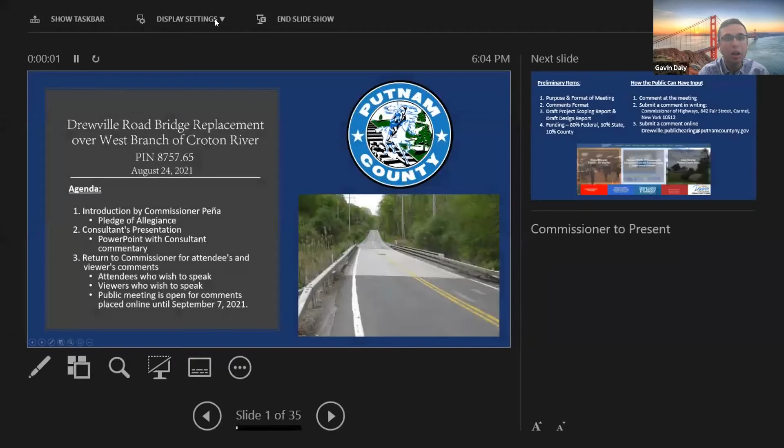Okay, so you're the host. Okay, sounds good. All right, can everyone see the slides now? Should just be a single slide. Yes, we can see the slide. Perfect. Okay, so I have a different slide with my notes that I'm going to go through.

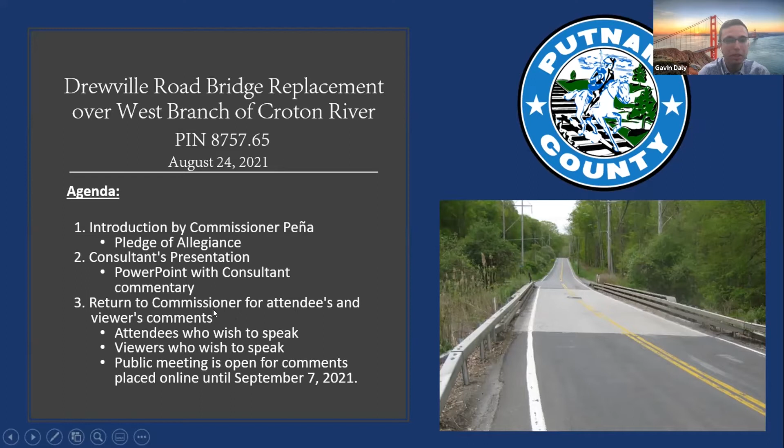Just a quick rundown of the agenda. Alexis, thank you for the introduction and going through the Pledge of Allegiance. I'm going to go through the design consultant's presentation, and then we'll return to the county staff to go through the attendees' comments and discuss the format of that. I'll just go on to the next slide.

As I was introduced, my name is Gavin Daly. I'm an engineer with McLaren Engineering Group, the firm retained by the county to design and oversee this project. This project is PIN number 8757.65, Drewville Road Bridge, County Road 36, over the West Branch of the Croton River, located in the town of Carmel, Putnam County, New York. The goal of this public information meeting is to outline the purpose, the use, and the benefit to be served by the project. We'll discuss the location of the project and the reasons for the selection of that location, and the general effect of the project on the environment and residents of the town of Carmel and the county of Putnam.

For this presentation, I will cover some background information on this project and how it has come to be. I will then present the design objectives of the project and how the project is being funded. Next, I will review the design alternatives that were evaluated by the county and ultimately discounted for various reasons. After that, I will describe the preferred alternative in detail and why it was chosen by the county as the preferred alternative. I will then recap the project, after which we will take formal public comments and questions for the record.

This meeting is being recorded. An audio-visual recording will be available at the county's website, www.putnamcountyny.gov/highways projects. Additionally, various documents will be made available to the public for examination by appointment and with adherence to proper health protocols at the Office of the County Executive and at the Office of the Putnam County Clerk. Any person who would like to examine these records should contact the County Office at 845-808-1142, extension 49301, to make an appointment.

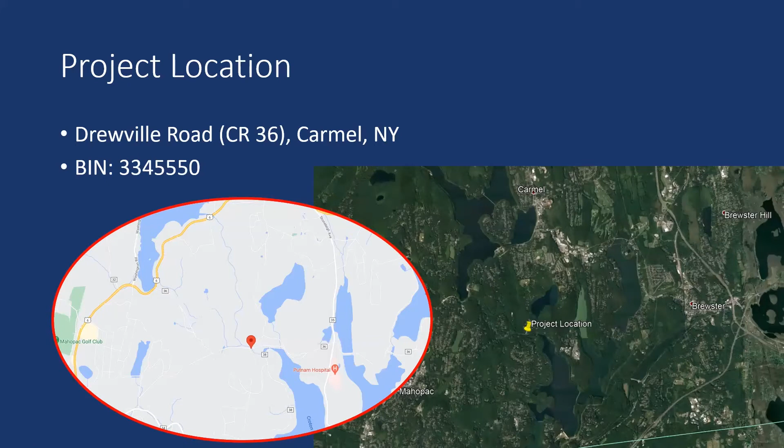There are several key stakeholders involved with this project. First and foremost is the owner of the bridge, Putnam County, as well as the town of Carmel and local residents and road users who cross the bridge regularly. We will also be coordinating with Putnam Hospital Center and emergency services for their input and to ensure that they are notified and can plan for the construction in the area.

We are also working closely with the New York State Department of Environmental Conservation and the New York City Department of Environmental Protection, as they own the land on either side of the bridge. Other stakeholders include the U.S. Army Corps of Engineers and local utility companies, New York State Electric and Gas, Central Hudson Gas, and Comcast.

Before we get into the details of the project, let's look at a broad overview of the timeline. Currently, the project is between the preliminary and detailed design phase, and prior to detailed design, the project must first obtain design approval by the New York State Department of Transportation. This is expected to occur in the next 1 to 2 months.

When the project moves into detailed design, the plans and right-of-way acquisitions will be progressed further and permitting applications will be submitted. These tasks should occur over the fall and winter of 2021, at which point the project will be submitted to the Department of Transportation for final design review. After their review, the plans will be finalized in early spring 2022, where once again the project will be submitted to the DOT to obtain authorization to advertise for construction. Construction is then expected to begin in late spring 2022 and finish in the fall of 2022.

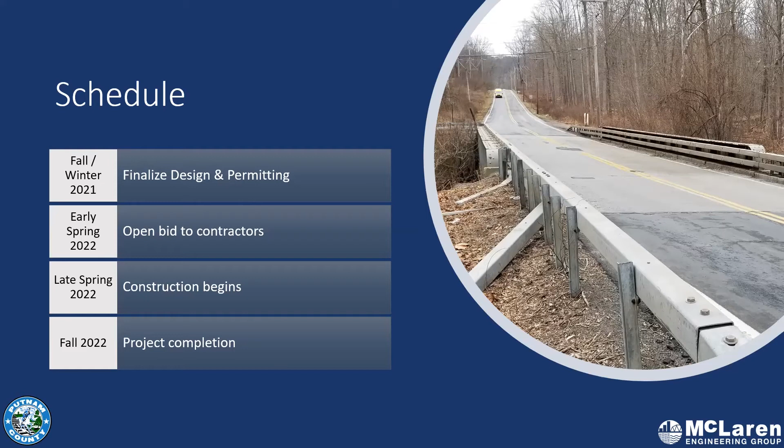Now let's move to the purpose of the project. So what exactly is this project, and why are we doing it?

The existing bridge was built in 1930, making it over 90 years old. It is reaching the end of its usable lifespan and is deteriorating rapidly. The bridge is functionally obsolete, meaning it does not meet modern highway design standards. The 9-foot lanes are very narrow, and 1-foot shoulders do not provide room for pedestrians or bicyclists. There is severe steel corrosion throughout the bridge, as you'll see in the next few slides, and there is significant risk of flooding at the bridge during heavy rainstorms. You can see in the image on the right the water level the river has reached, and notice how the steel corrosion is greatly affected by it. Based on these factors, this bridge is a high priority for replacement.

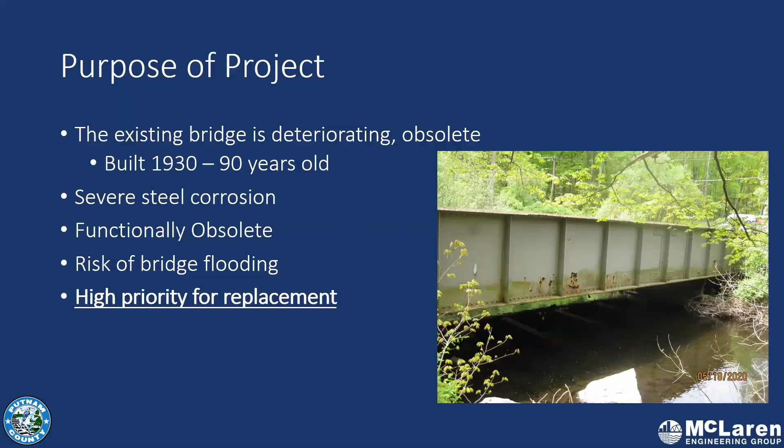Here are a few pictures highlighting the steel corrosion in the existing bridge. The bottom left picture shows one of the 4 heavily corroded bearings that support the main girders of the bridge. Above that is a picture of the top of that bearing. There is some severe section loss in that girder's bottom flange, which is one of the horizontal steel plates on top and bottom of the girder. That jagged line there should be going straight across. In the top right corner is a picture taken from underneath the bridge, looking out towards the side of the bridge, where one of the 2 main girders is exhibiting more significant section loss, shown by a large hole in the web, which is the main vertical steel plate of the girder. The girder is labeled a primary member, meaning it's a piece of the bridge that directly supports the loads on the bridge.

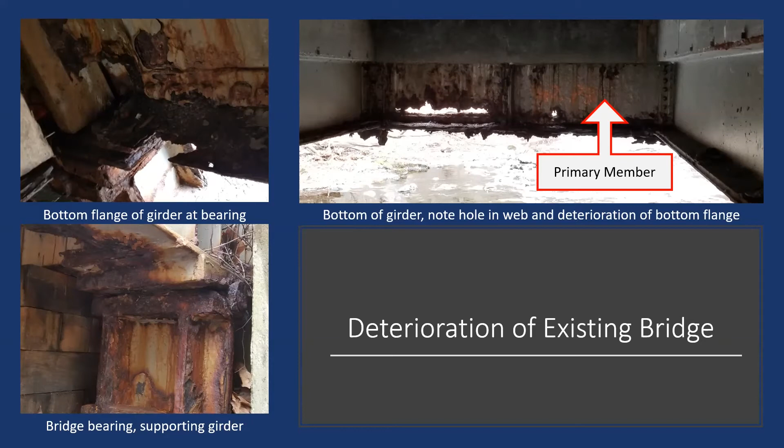On top of the bridge, there is some minor deck cracking and asphalt patches to repair damaged concrete. As of 2 years ago, this section of Drewville Road carries 4,860 vehicles per day, and that number is expected to grow to around 5,100 in the next 10 years. The lane and shoulder widths do not meet current design standards, and the shoulder width is unsafe for pedestrians and cyclists.

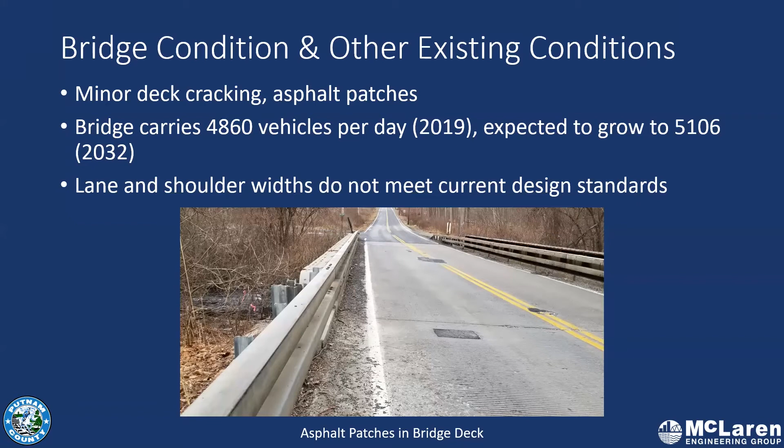This brings us to the objectives for this project, what we're trying to accomplish. The first objective is to restore the bridge condition rating to a 5, which is good, or greater, for at least the next 75 years. Other objectives are to improve overall traffic conditions and to meet current New York State DOT engineering standards, while having the least impact on natural, socioeconomic, and other environmental factors.

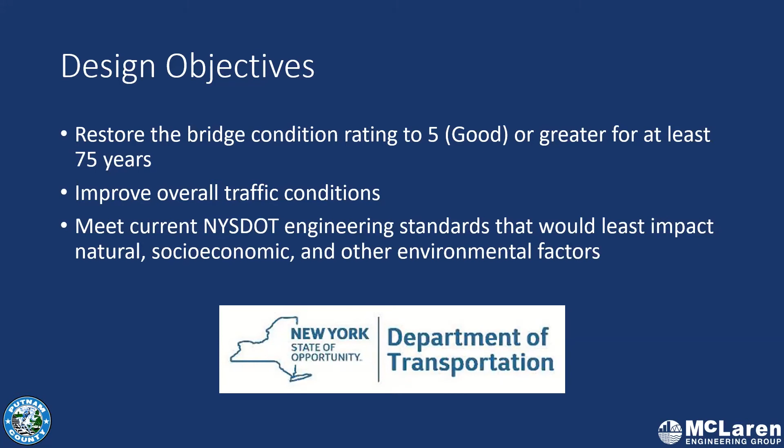Here we have the design criteria for the project, which shows how the safety of the road will be improved and meet modern standards. The posted speed limit is 40 miles per hour, and that won't change. However, the existing lane width will be increased from 9.4 feet to 11 feet, and the shoulder width will be increased to 4 feet on each side of the bridge.

These increases not only make the road safer for drivers, but pedestrians and cyclists will also benefit from the added shoulder width. The widths of the lanes and the shoulders on the approaches, which is the road leading up to the bridge, will stay at their existing 11 feet for the lanes and 1 to 3 feet for the shoulders.

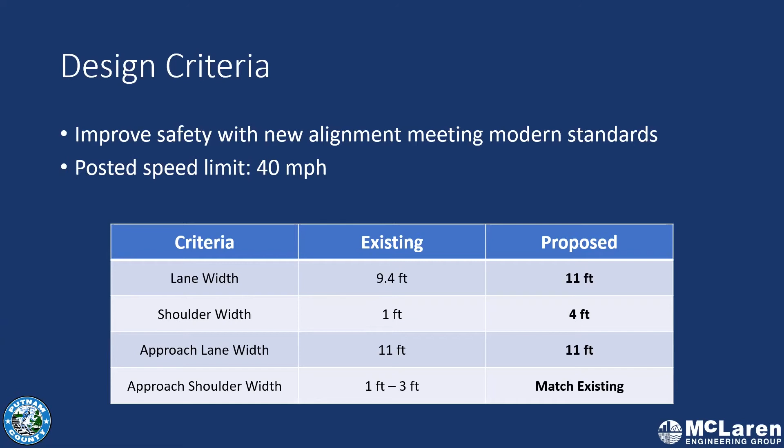One of the controlling factors in the preliminary design of the bridge was the consideration of hydraulics. The existing bridge is low enough relative to the river that the water level can rise above the bottom of the structure. You can see this in the bottom picture on the right. The lower portion of the steel is discolored from water.

Additionally, debris can become trapped underneath the bridge, which can block water from flowing through freely and increase the potential for flooding. To mitigate flooding risk, the proposed bridge will be constructed on a higher profile, which will raise the bottom of the bridge and allow the river to flow freely.

There are also high-risk scour conditions at this site, which means that over time, the flowing water erodes the soil that supports the abutments. Because of this, the abutments of the existing bridge will remain in place to protect the new abutments from scour damage caused by the flowing water.

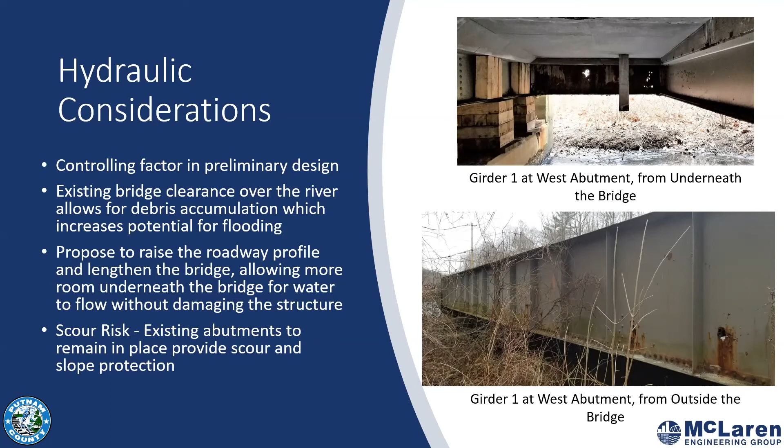These pictures were taken on August 12th of this year following a series of thunderstorms. The pictures on the left and top show how close the water level got to the existing bridge. In the bottom right corner is a picture of a spillway that is about 2 miles upstream of the bridge. The spillway holds back the West Branch Reservoir and is controlled by the DEP.

They can control the release of the water from the reservoir up to a certain flow. After that, any excess rainfall from storms spills over the top. Raising the bridge will reduce the risk of flooding due to storms like this one.

At this point, I'm going to turn the slides back over to Gavin, who's a senior engineer on this project, and he will discuss the alternative solutions and the proposed design.

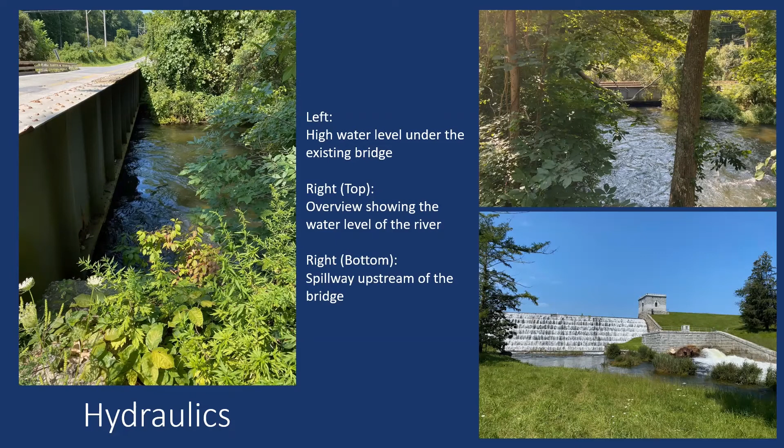Okay, thanks, Paul. You'll just have to make me the host again. Paul, if you check the bottom of the screen, the bottom menu, there's an option. I think I found it here. Okay. There we go. Okay, I got it. Okay. So you guys can hear me okay?

Yes. Okay, so I'm back, and I'll now present the potential options considered during the preliminary design process. So thank you, Paul, for the introductory design presentation. So, alternatives. When considering the replacement of an existing bridge, all potential possibilities are given equal consideration. The first option would be to do nothing and leave the bridge in place. It's called the null alternative.

Second would be to replace the bridge on its existing alignment with an entirely new structure at the same position. The third alternative would be to try to repair the bridge to extend its service life. And the fourth would be to replace the bridge with a new structure adjacent to the existing bridge on a new alignment.

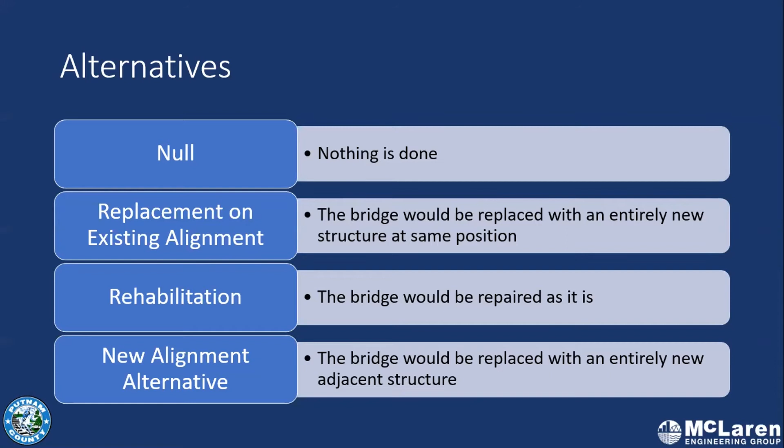So for the first option, as I described, known as the null alternative, the existing structure would remain in place with only maintenance type repairs performed. The bridge would continue to deteriorate, posing a potential safety hazard, leading to the eventual closure of the bridge. This obviously does not meet the project objectives.

As you can see on the left, the low elevation of the bridge exposes it regularly to water, leading to severe corrosion of the steel girders. You can also see a kind of greenish tinge to the bottom of the girder. That's how high up the water elevation goes, and it leads to the corrosion of the bottom of the steel girder.

On the right, you can then see the temporary timber shoring supporting the bridge, without which it could be closed to traffic. You had a closer up view of that timber shoring in Paul's slides earlier in the presentation.

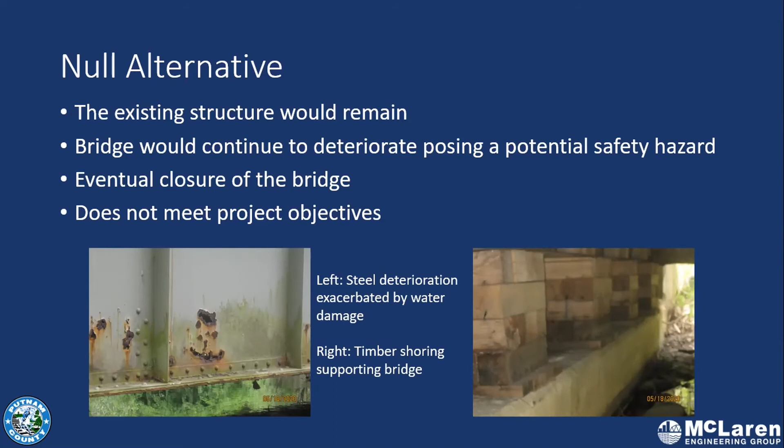Okay, so following on from the null alternative is the next option, which is to replace the bridge on its existing alignment, which is the preferred alternative of the county. The new bridge, which would be designed to modern standards, would have a service life of 75 years or greater. The alignment would be shifted slightly to the north to improve intersection geometry and improve overall driver safety.

Keeping the existing bridge alignment will keep environmental impacts to a minimum, as fewer trees and wildlife habitats will be impacted. The new bridge will be longer to improve hydraulics by increasing the size of the opening through which the river can pass. The profile of the bridge will be raised, lifting the bottom of the bridge away from the high water elevation to mitigate flood risk.

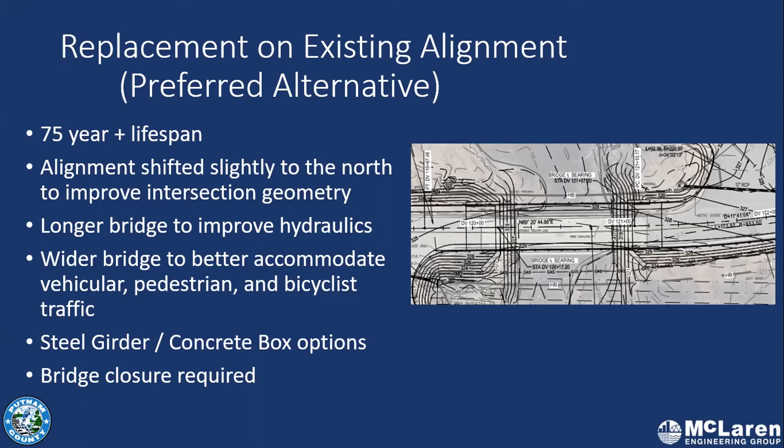The new bridge will be wider to better accommodate vehicular, pedestrian, and bicycle traffic. And both steel girders and concrete box beams are being considered to form the superstructure, so the load carrying element of the bridge. And for this option, bridge closure would be required with a temporary detour provided.

Now, the third alternative considered was rehabilitation. And for this, major structural repair work would be involved, with a bridge closure and temporary detour also required. While the lifespan of the bridge would be increased, it would still need to be replaced in about 25 or 30 years. The existing bridge is a through girder design, which means it has two deep girders on either side. The girders are heavily corroded and need to be replaced. They cannot be repaired in place. They are also non-redundant, which means they cannot be removed without costly temporary support of the bridge to maintain stability.

The existing foundation details are unknown, and it is unlikely that the 90-year-old foundations buried under the ground where we can't access would be able to accommodate the raise in profile required to improve hydraulics and the resulting increased loads from abutment modifications to achieve that. Now, the abutment is the foundation supports on either side of the bridge. It's just a technical term. The foundations would need to be replaced, which cannot be done with the existing bridge remaining in place.

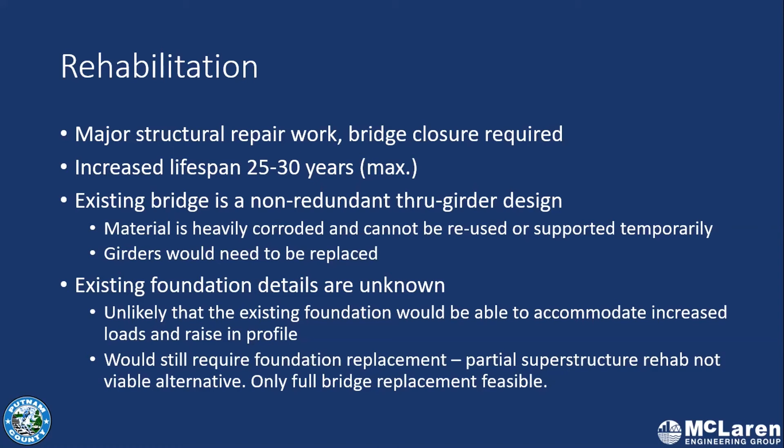And given the poor condition of the girders and inadequate foundations, only a full bridge replacement is really feasible. A partial superstructure rehabilitation like this is not a viable alternative. The cost and short lifespan make this option economically infeasible.

And the fourth option is replacement on new alignment. And this option would have similar attributes to the replacement on existing alignment mentioned earlier. It would have an increased lifespan, be longer, wider, and with similar steel and concrete superstructure options available. The new bridge will be built south of the existing bridge.

Now, while it would avoid a temporary detour during construction, the new alignment would move the bridge outside of county property, requiring a costly and time-consuming land purchase from New York City Department of Environmental Protection, which is the owner of the land either side of county property. Environmental impacts would also be higher, as the new alignment would pass through existing green space and wildlife habitats.

With a new alignment, the two intersections either side of the bridge would require substantial reconstruction and realignment, especially that intersection of Cherry Hill Road with Drewville Road. Most critically, the new southern alignment option would conflict with the high voltage electrical transmission lines running along the south side of Drewville Road. These lines cannot be relocated, therefore this is not a viable alternative.

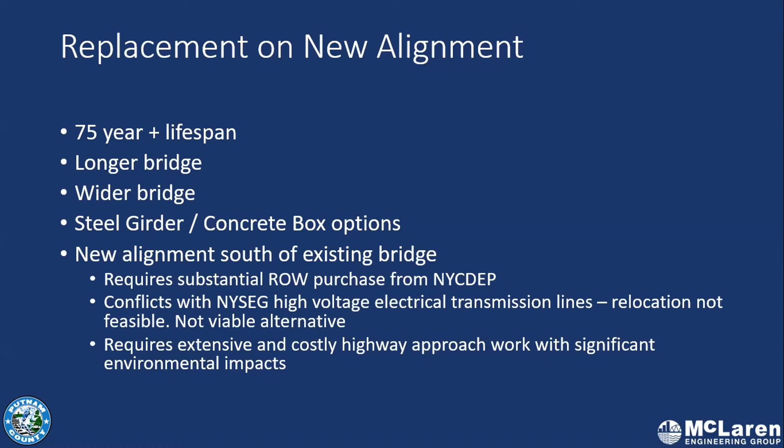The proposed bridge will shift the roadway alignment slightly to the north, so just about 5 feet this way. It's important to note that New York City Department of Environmental Protection is the only property owner that will be directly affected by the construction work. So there's something called the highway boundary, which is adjacent to the road on both sides, and beyond that is NYC DEP property.

Another item to note is to raise the bridge further above the river to avoid flood damage, we're raising it about 3 feet. The elevation of the roadway profile, not just on the bridge, but also either side of the bridge, will also need to be raised. So that leads to the necessity for roadway reconstruction extending into both intersections, so the Seminary Hill Road intersection and also the Cherry Hill Road intersection.

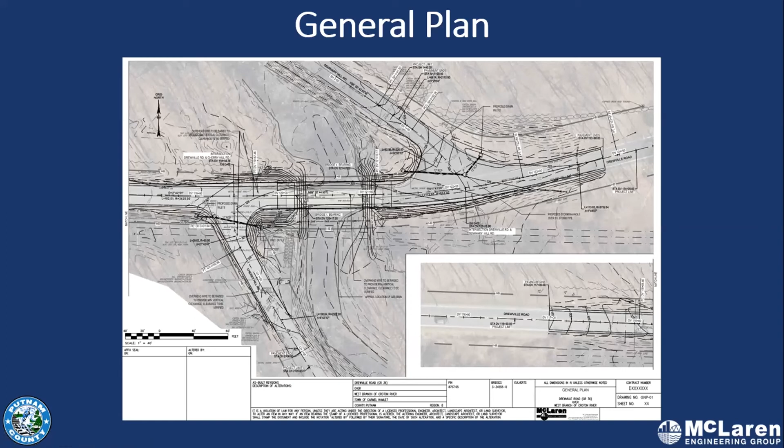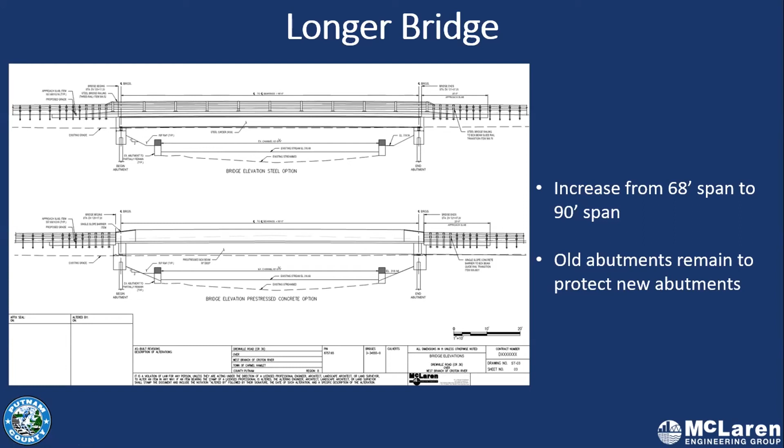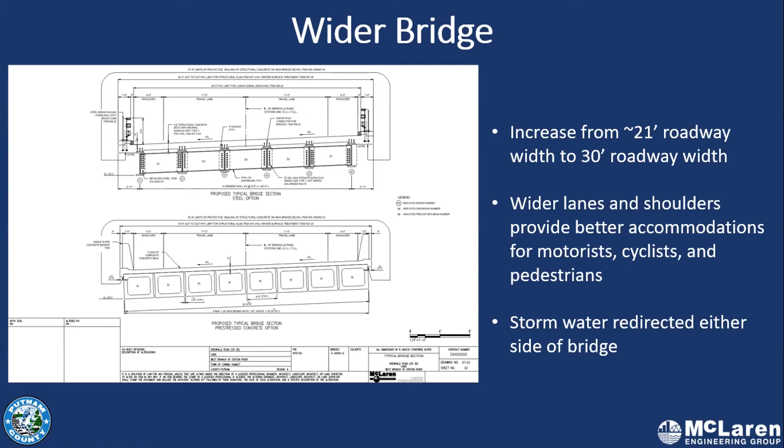The current 21-foot roadway width will be increased to 30 feet, and this will meet modern design standards. And as Paul mentioned earlier, the wider driving lanes and 4-foot shoulders will provide better accommodations for motorists, cyclists, and pedestrians, so the whole community. The decision on the exact choice of bridge superstructure type will be made in the later design phases, so whether we'll go with steel or concrete. On another note, stormwater will be collected on the bridge by the curbs, and it'll be redirected off the bridge to dry swales on either side of the bridge. Okay, so that's the description of the proposed bridge.

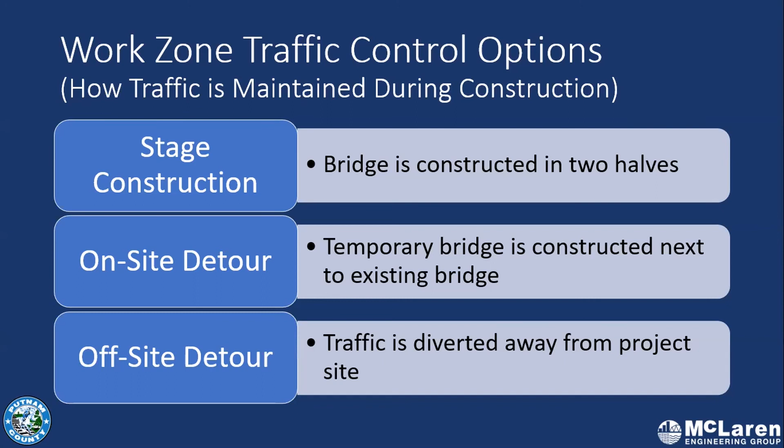And so our next consideration is how traffic is maintained during construction of the proposed bridge. The technical term for this is work zone traffic control. And for this, we have 3 options. The first is staged construction, where the bridge is built sequentially in 2 halves. The next is the on-site detour, where a temporary bridge is built adjacent to the existing bridge. And finally, the off-site detour is where traffic is diverted away from the project site, allowing construction to proceed quickly and without conflict.

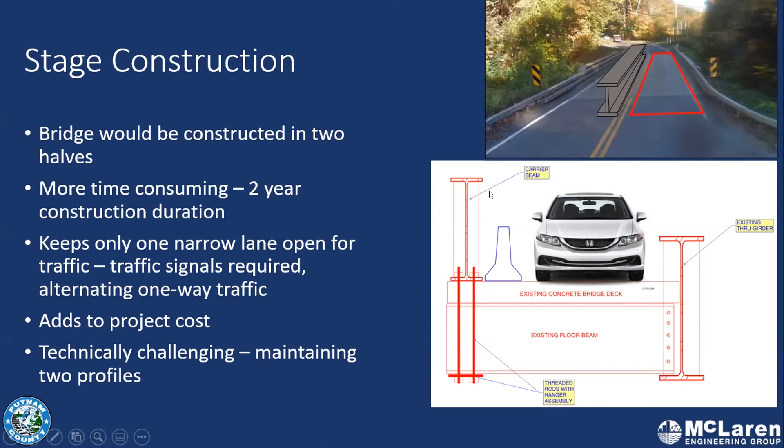For the on-site detour, a temporary bridge will be constructed next to the south side of the existing bridge. This may require closure of Cherry Hill Road during construction of the temporary bridge. And this option adds significant cost to the project, as you are building 2 bridges, but keeping only 1. So there's a lot of lost dollars in terms of investment. This option has similar drawbacks to the new bridge on a new alignment south of the bridge. It has greater environmental impacts, uses New York City Department of Environmental Protection property, which requires a costly land purchase, and also potential conflict with NYSEG high voltage lines. And as we mentioned earlier, these lines cannot be relocated. Therefore, this is not a viable alternative. We also looked at a temporary bridge to the north and had to dismiss that because of cost, significant environmental impacts, and the impacts to the Cherry Hill Road intersection to the west.

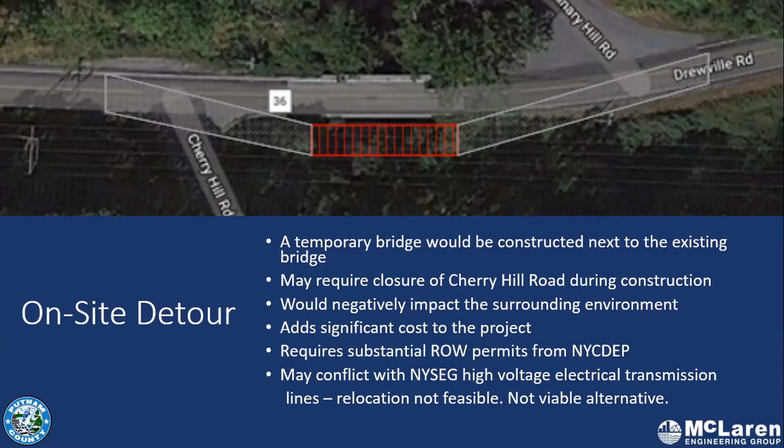The official detour is via Cherry Hill Road, Stebbins Road, and West Shore Drive, adding approximately 5 to 6 minutes to the journey time. We also expect that traffic from outside the area will use other routes to avoid the detour altogether.

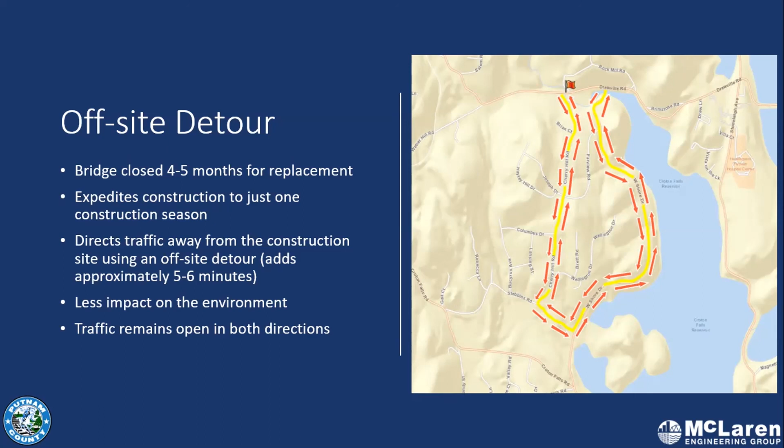This option is the least cost, has less impact on the environment, and keeps traffic open in both directions. For those reasons, this is the option preferred by the county.

Infrastructure projects such as the bridge replacement require coordination with a number of stakeholders, as Paul mentioned earlier. The permitting process with various state agencies, such as the US Army Corps of Engineers, New York State Department of Environmental Conservation, and NYC DEP, will ensure minimal impacts to the surrounding environment.

In terms of legal environmental requirements, the project has been identified as a federal NEPA, or National Environmental Policy Act, D-list categorical exclusion project, as documented in the project's Federal Environmental Approval Worksheet. In addition, all New York State Environmental Quality Review Act requirements, otherwise known as SEQRA, have been met.

Specifically, the project has been progressed as an unlisted action with the county designated as lead agency. After completing a full environmental assessment form and coordinating an agency review, a SEQRA negative declaration was issued by the county.

The county is currently coordinating right-of-way issues with New York City DEP, which, as I mentioned earlier, is the only property owner directly affected by the work.

As Paul mentioned earlier, the affected utility companies have been engaged, leading to the planned temporary relocation of low-level power lines from the north side of Drewville Road to the south side at the intersection with Cherry Hill Road.

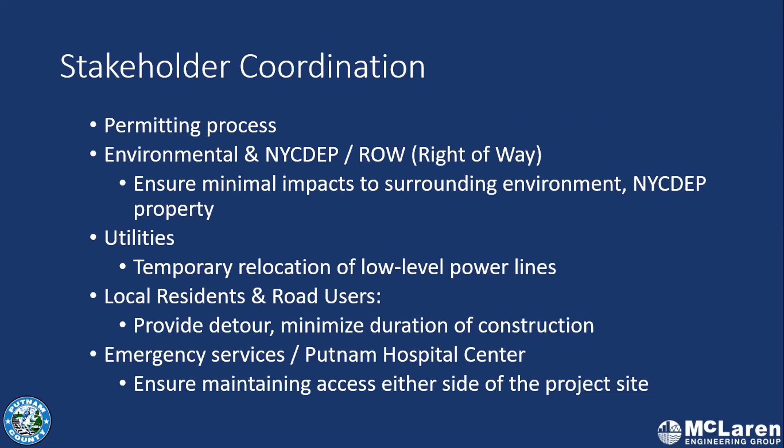In summary, the existing bridge is deteriorating and functionally obsolete, and it needs to be replaced. The proposed bridge will meet design objectives, providing a safe bridge that meets current engineering standards.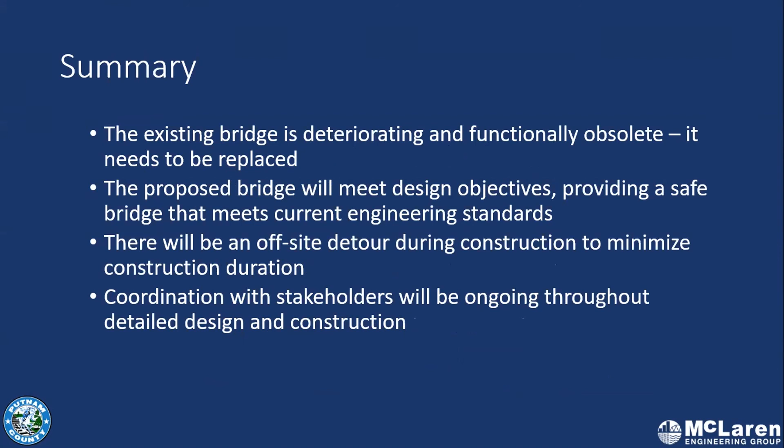An off-site detour will be utilized during construction to minimize construction duration. Coordination with stakeholders will be ongoing throughout the detailed design stage and construction.

This concludes the technical portion of the public information meeting.